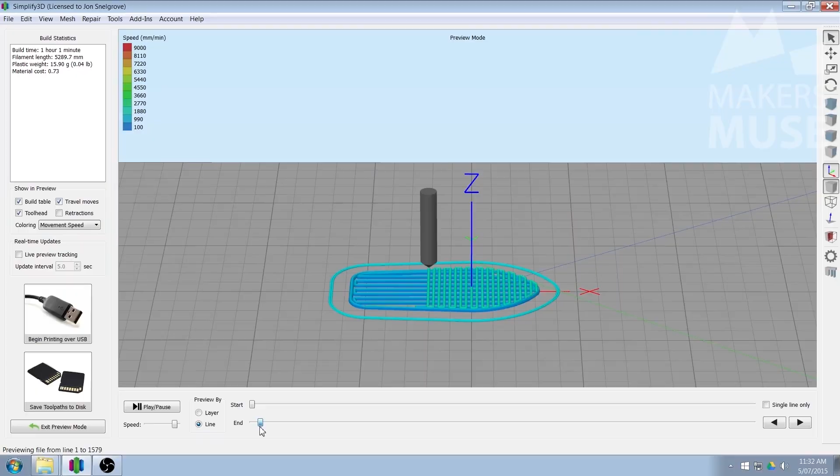So tools of the trade, you're going to need some measuring tools. So what I have here is a ruler and a pair of digital calipers. So ideally you want a really nice pair of vernier or digital calipers. These are some pretty cheap ones, like 10 bucks or something. I got them quite a while ago. But they'll do for our purposes.

But before we even jump into Fusion 360, we want to draw what we're going to model. And this is really important. I always recommend that you draw and plan what you want to model before you model it. And that's because you don't want your creativity to be limited by your knowledge of a certain bit of software. And that will happen if you start modeling straight away. So let's grab a pen, let's grab our calipers, and let's figure out what we're actually going to make.

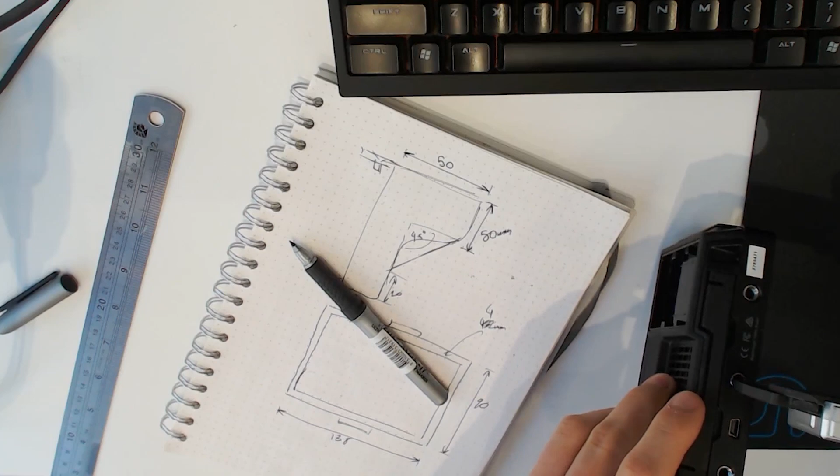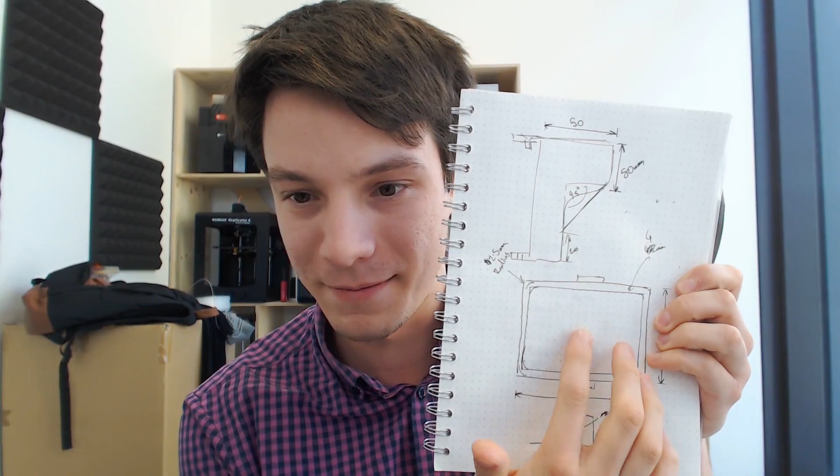Alrighty, so it's a very quick sketch, but this is what I've come up with. Basically, I've tried to copy the other glare shield, and I've just made it fit this monitor. So I've got this really basic shape here with the dimensions. I've got 138 by 90 millimeters on the outside, then a 4mm wall, and then I've got it sticking out by 50. Maybe too long or too short. That's how much this one sticks out.

So I'll try that. The good thing about Fusion 360 is it's parametric, so you can go back and change things and the whole part will update, which is cool. Let's get started. Let's jump into Fusion 360.

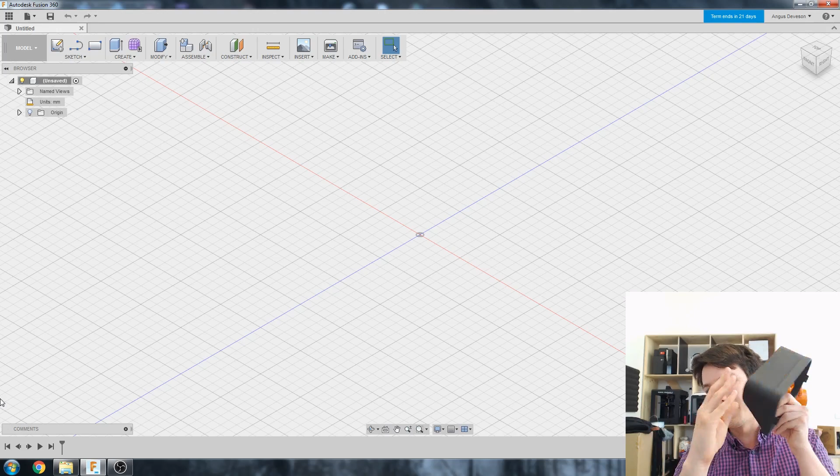Alrighty, so we're in Fusion 360 now, and this is a pretty simple shape to design. So I'm thinking what I'll do is I'll do the outline for the hood and then do an extrude. Then I will do a cut to make it into the right sort of shape. Then I will do the two little tabs to attach it to the thing. So it should only really be 3 operations, 3 sketches.

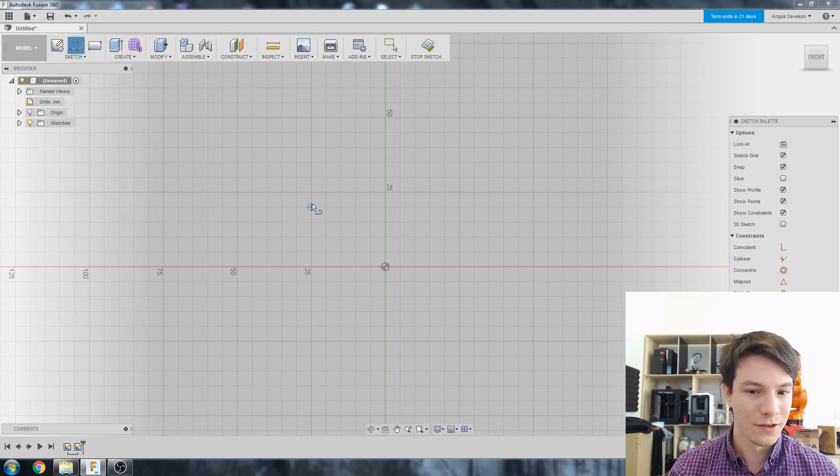Let's have a look. So first we want to create a sketch. So let's go to sketch, and I'm going to create it on the front plane. So front, select, zoom in, and let's start making our thing. So I guess the main shape is a rectangle, really. So let's start with a rectangle, but I'm going to start with a different kind of rectangle. I'm going to start with a center point rectangle. I always like doing things perfectly on the origin.

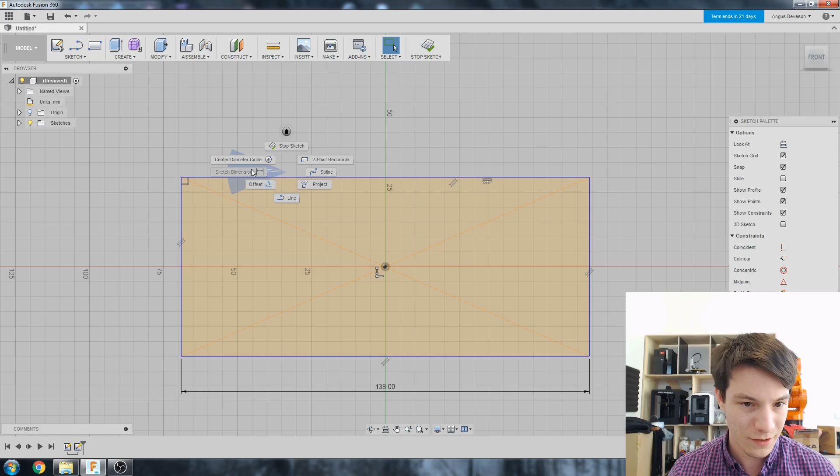So let's go from the center out, and let's enter 138, and then we need to define the height as well. So let's see if we can do that. Sketch, dimension, and let's define the height as 90. All right. And we want to offset it by 4mm to create our little inner wall.

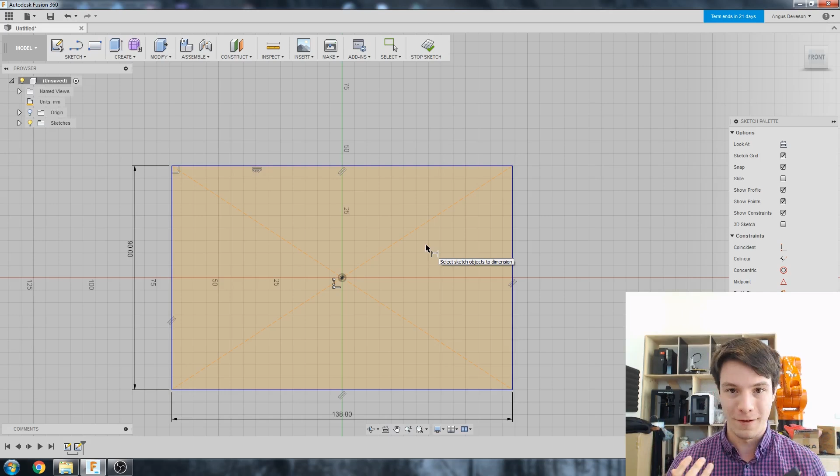But before I do that, I have to guess what radius this is. I don't have a radius gauge, and that's the only realistic way you can accurately measure radiuses, or radii. But it looks like a 2.5mm. So I'm going to go with that, and let's see how that goes.

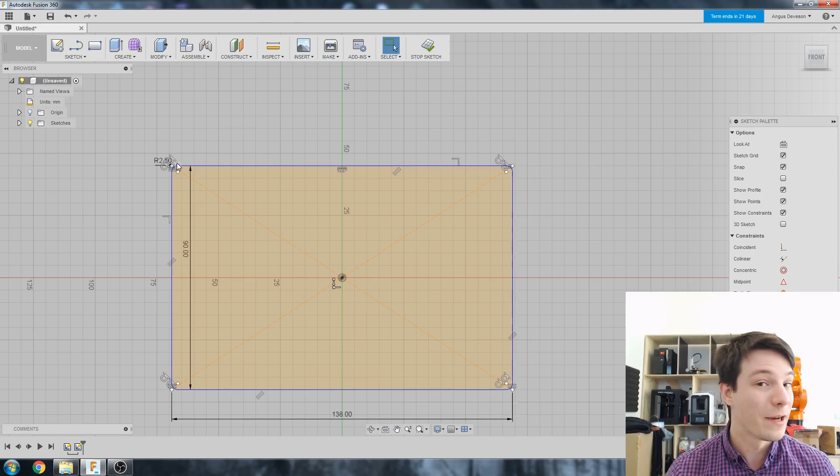So to do a radius on your sketch, we want to go to sketch, and then go down to fillet. So fillet, radius. And we're going to select these two, and then these two, and these two, and make them all 2.5. There we go. So they're all going to basically follow each other. So if I update this, I can parametrically change my design. So that's pretty good, pretty simple.

So we've got 2.5 fillets, and we've got a shape that's now going to be offset by 4 mil. So this might make the fillet break, maybe, but we'll see how we go. So we're going to go to sketch, and then we want to offset. Select what you want to offset, and then we want to make it offset by 4.

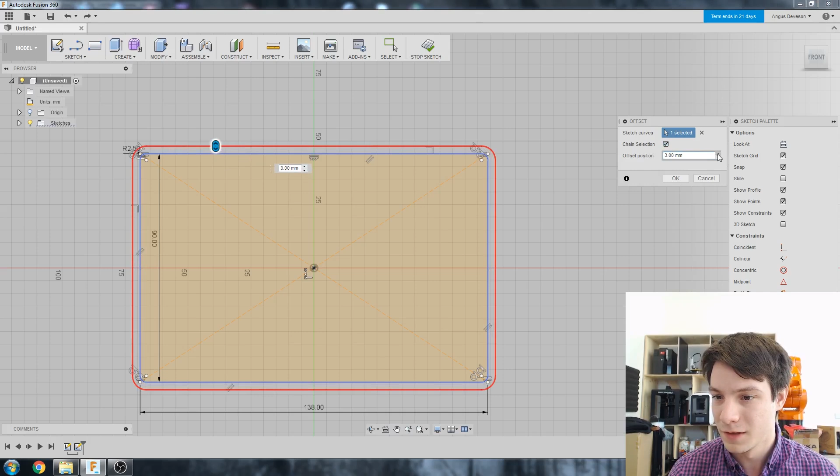But we want to offset it in the other direction. There we go. -4. Cool. So like I said, it did break that fillet because, imagine the fillet's here, it can't actually be concentric with it properly. So we can just add another small fillet just to make it look good, I guess.

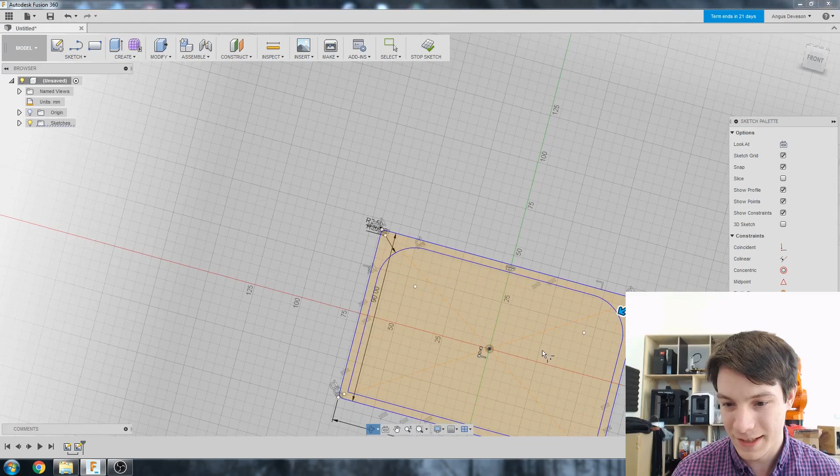So let's go to sketch fillet, and we'll click around. I quite like that Fusion 360 is not throwing a fit here. Oh, now I'm throwing a fit. I'm not used to the hotkeys, I will say that. So let's go to front again. So you have to hold down Control and then middle scroll wheel click to pan. That's what I was trying to do.

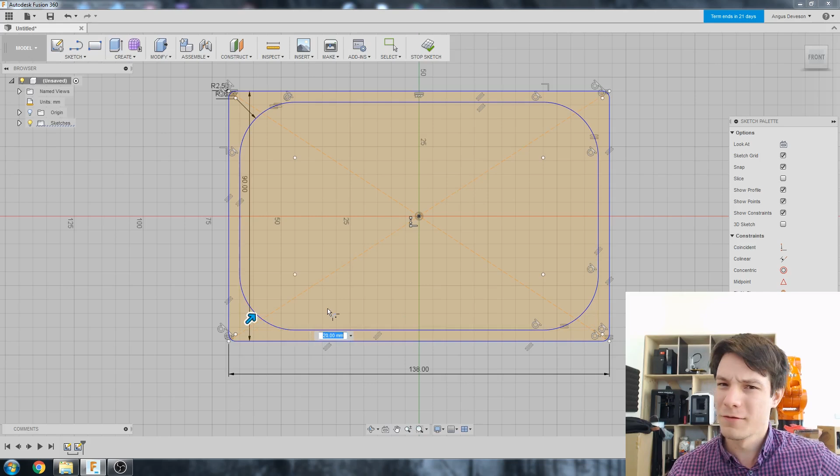Okay, so let's go to sketch again. Sketch fillet, and then let's select these points like that. And I just want a really small fillet just to make it look good. So let's go with 0.5. It might be a bit too small. 1. Yeah, 1 looks good. Okay, so it's not going to be concentric, but it will look good. And that's all we really need to do for that step, basically.

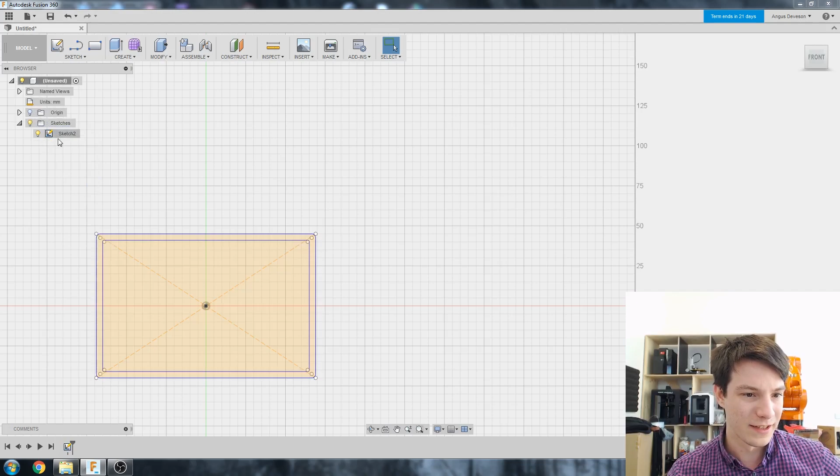So let's just now stop the sketch. And if you see on the left-hand side, we've got our parts and our sketches. I don't know why it's showing 2 sketches. Delete. That's the other sketch I started and didn't do anything with. Right, so we've got our sketch, and we just want to add some thickness to it. So that's called an extrude. What an extrude does is it takes a sketch, which is like a profile, and then just sucks it out and gives it thickness.

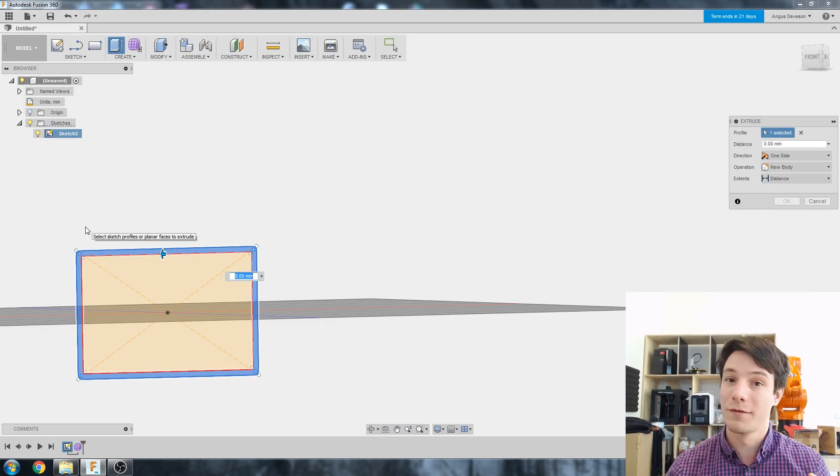So let's go to create and extrude. Awesome. So extrude, we want to select the profile we're extruding, which is of course the thin profile that we drew. And because we accurately measured what we want to do, we want to extrude it by 50 millimeters. So 50. How easy is that? So here's our sunshade so far. You can already see it's starting to make that shape. We just now need to start cutting away to further refine it.

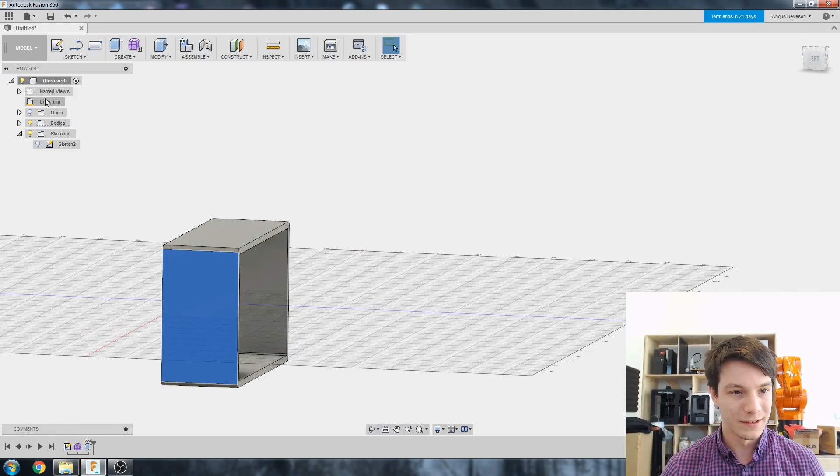So let's select this face here, and let's make a sketch on it. Create sketch. And what we're going to do now is cut. So instead of doing an extrude, we're going to do what's called an extrude cut, where it will take away material instead of adding it. Right, so I've got my shape, and I'm just going to start drawing out what I want to cut away. So go to sketch, and this time I'm going to select sketch line.

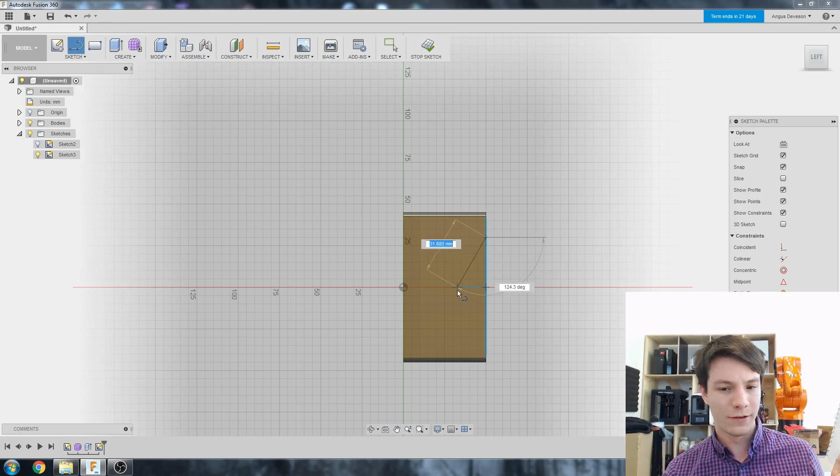So I'm going to go from here, go down 45. I will refine this later with dimensions, and then down. And because we're doing an extrude cut, we can actually overshoot a little bit like this. There's no harm at all in doing a nice chunky block. This is what's going to cut away. So happy with that, cancel. And then we can go to sketch and sketch dimension.

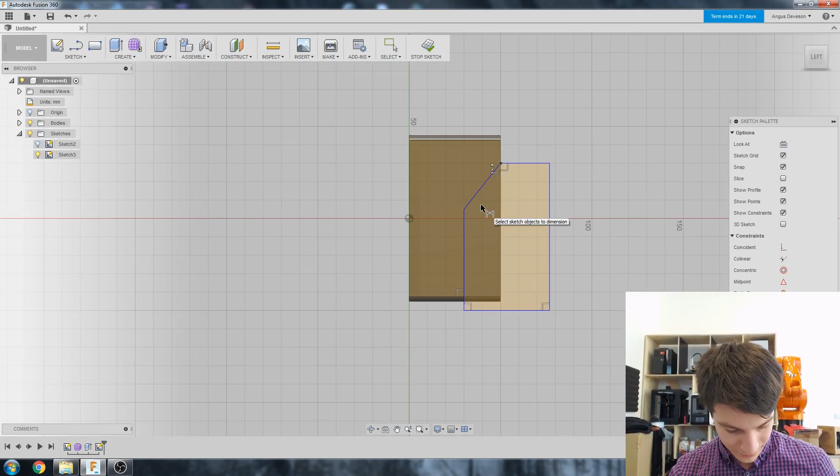Right, so what I've got here is the top part goes down 50 millimeters. So I'm going to select the edge of my shape and here and enter 50. Right, so as you can see already, because this shape is quite a lot larger, this might be a bit too deep. So maybe I want to make it 40. Maybe that. And again, we can go back and change any of these dimensions. It's extremely easy to do, and that's why parametric modeling is so powerful.

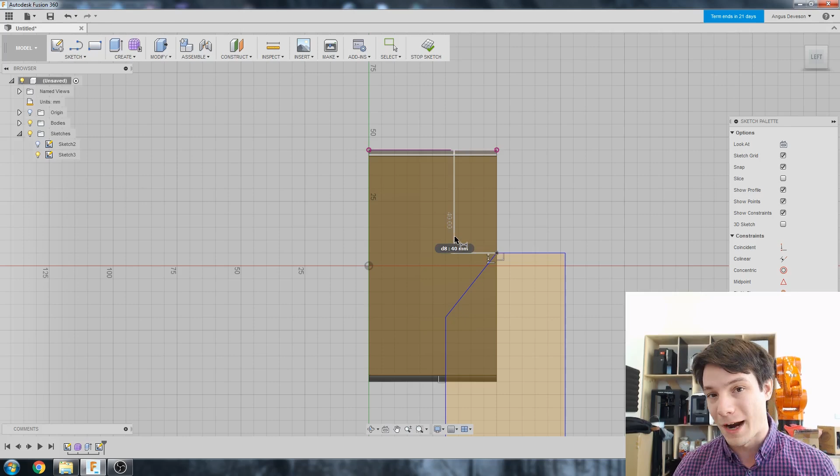So happy with that. And then it's 20 from the bottom. That's what I've got there. So let's go from here to there. 20.

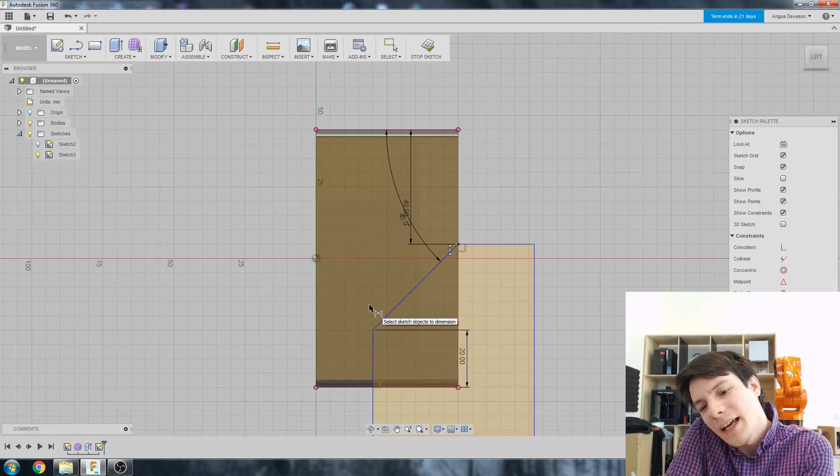Now I wrote 45 degrees here, but it doesn't necessarily have to be, but we'll see how that looks. So 45. Yeah, we'll see how that goes. That doesn't look too bad. I won't add any sketch fillets in. I think I'll fillet it later.

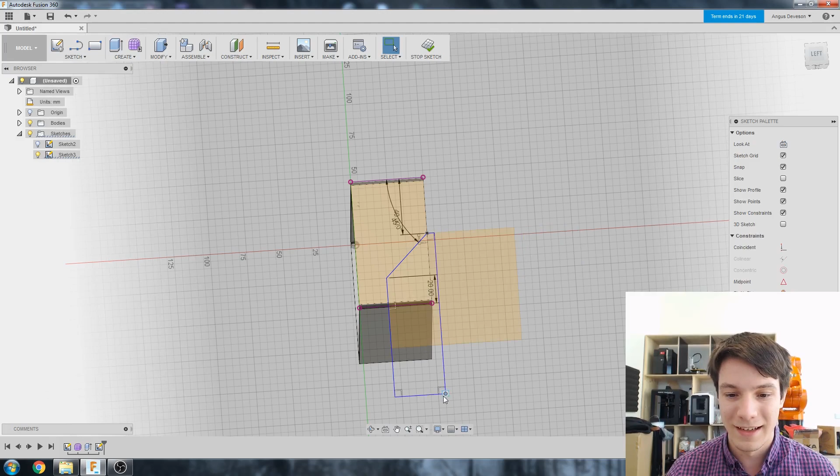If you ever wondered if your sketch is fully constrained or not, just grab a point and move it around and see what happens, see what moves. So if I move this, can't move it, right? But this one, you can. It's not constrained. So if this was important, you'd want to constrain it to make sure that it's locked in space and also exactly where you want it, instead of just drawing it and hoping it stays in place. So because that's just irrelevant, it's just going to cut away. I don't care about that, but I do care about these ones, which are all constrained.

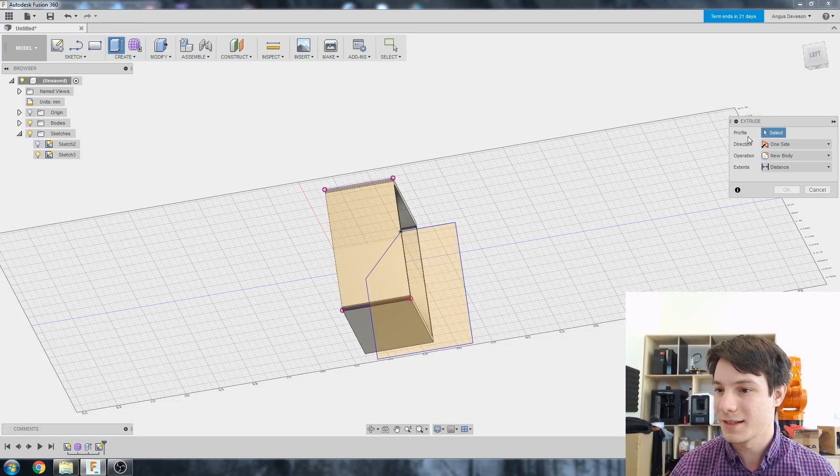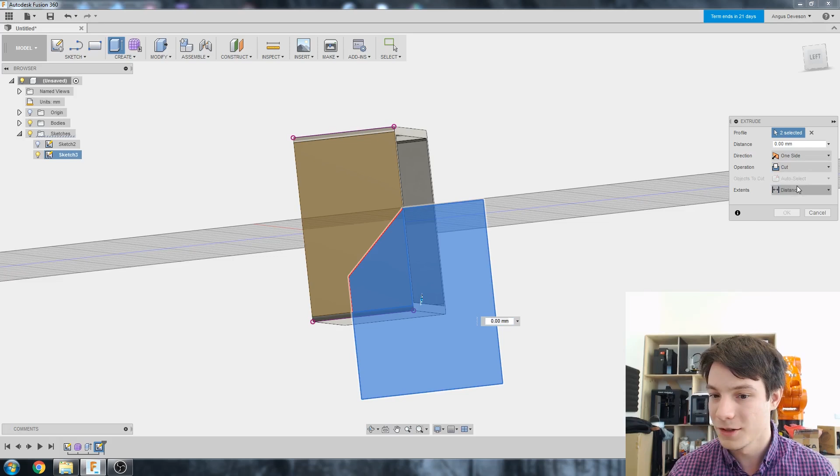Good, so let's stop the sketch, and let's go into create, extrude. But this time, we're cutting away. So let's select our profile, so select the sketch. Notice it automatically sort of works out where you might want to cut away. So here I had to select all of it because it suggested, did I just want to cut this away? Which is actually all I do want to cut, but it's got that radius there. So select both. And we want operation, cut. So we're not joining, we're not adding a new body, we're cutting away.

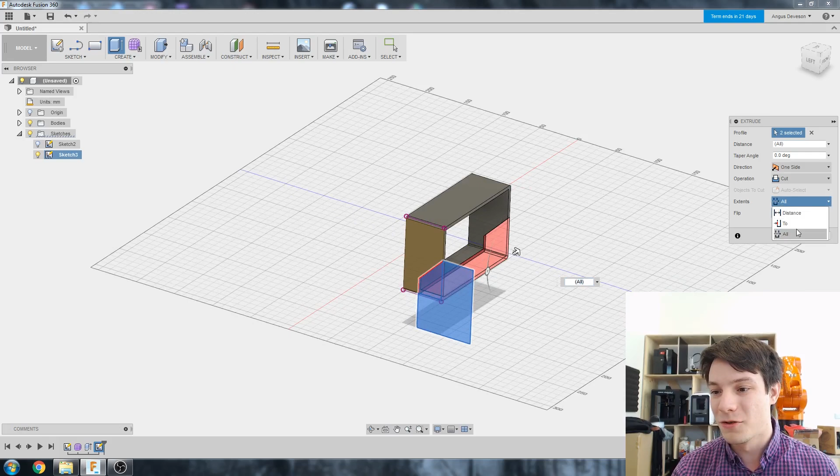And the distance, well, realistically, it's through everything. So that's just cut all the way through. I'm used to SolidWorks where you have an option to just cut through all, but there doesn't seem to be that kind of option here. Oh, there is. There you go. Here I am saying it can't do it, and it can. So extents all means it's going to go straight through your object, which is exactly what I want in this circumstance. Done. Okay. So here we have our shade. It's already starting to look like what we want. We're almost there.

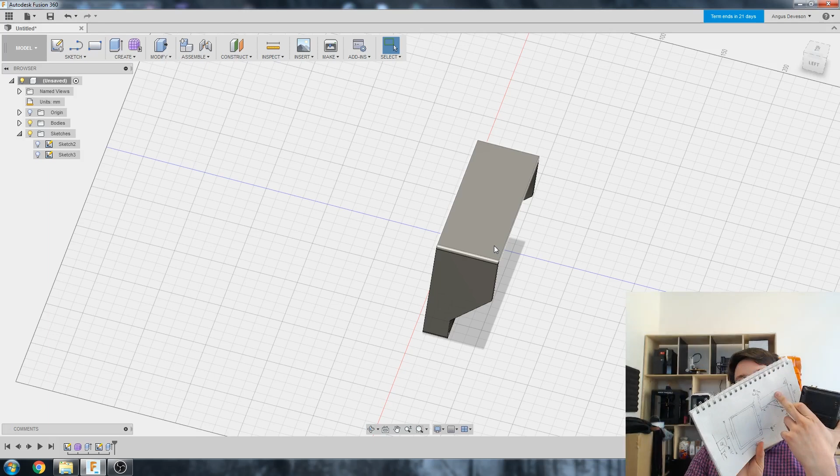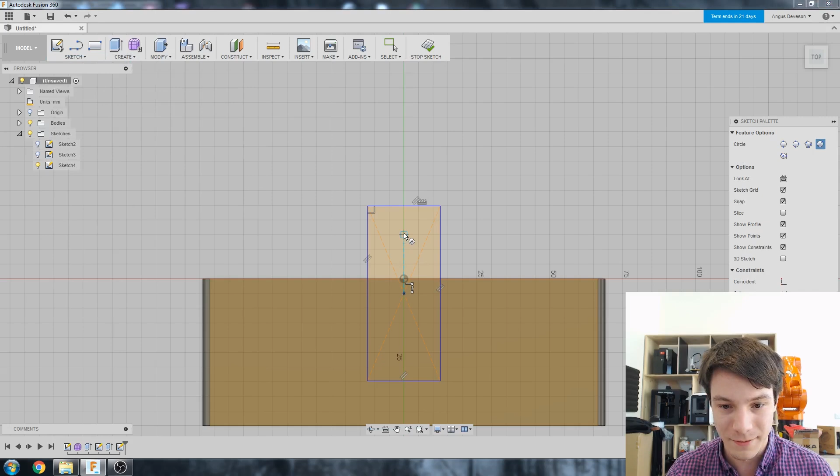So all we need to do now is find out how to connect it. And I suppose the best way to connect it is using these two threaded contact points. So the easiest way to do that would be to use two tabs, which I've drawn on here. So let's start drawing those. So I'm going to select this top face here and create sketch. And again, I'm going to use a center point rectangle just because I like them. So sketch, rectangle, center point rectangle. Drag one out like that. And also we're going to need a circle as well. So sketch, circle. Again, I like the center point circles. There we go. Right. Cancel, and let's start dimensioning this up.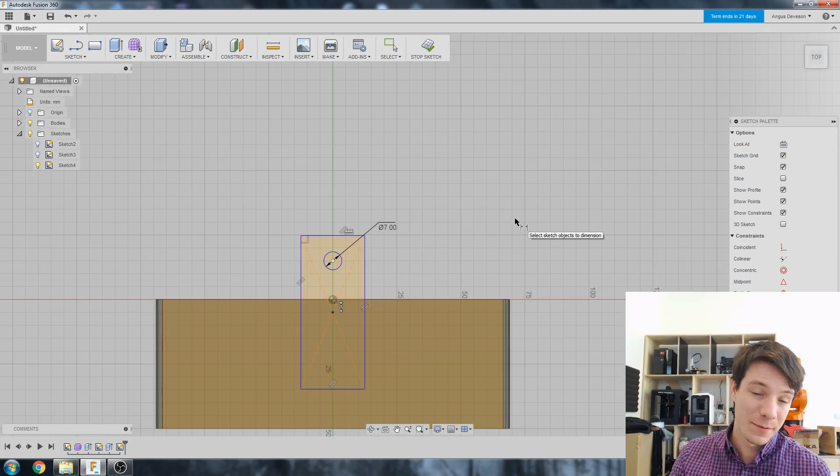So sketch, sketch dimension. So for this circle, we need to give enough clearance to allow that screw to go through. So if this is a 1/4 inch, it would be 6 point something. So I'm going to make it 7, just to add a bit of clearance. Knowing 3D printing is not 100% accurate, especially FDM, that will mean we've got a nice amount of clearance there. So go with 7 there. And I did measure the distance from the main body, and it's 10. So let's go with that. So here to here, 10.

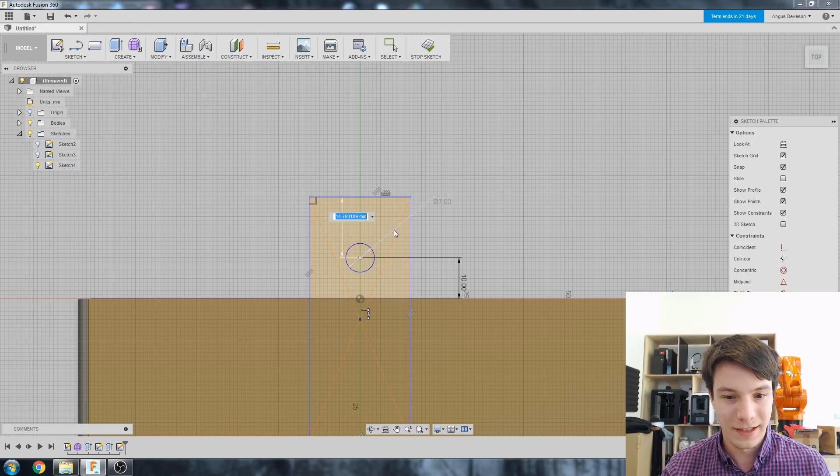Sweet. And then we just need to allow enough meat around it, I guess. So yeah, let's go here to here, maybe 10. That'll be plenty. And how wide our tab is, we can go from the center again. I guess we could do 10 again. Oh, that moved it. So this is a good example of constraining things. So here, because I entered a 10 there, it moved my circle off center, which is not what I want. So this would be a good example just to demonstrate how constraints work. And in future videos, I'll go into much more detail about how constraints work and how powerful they are.

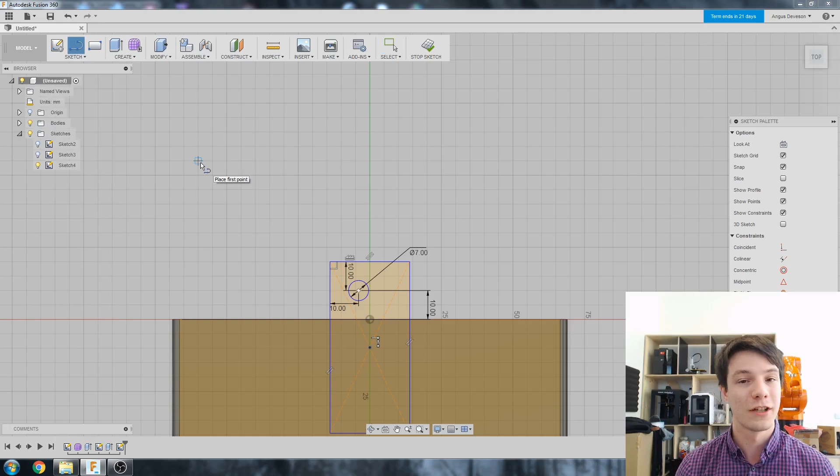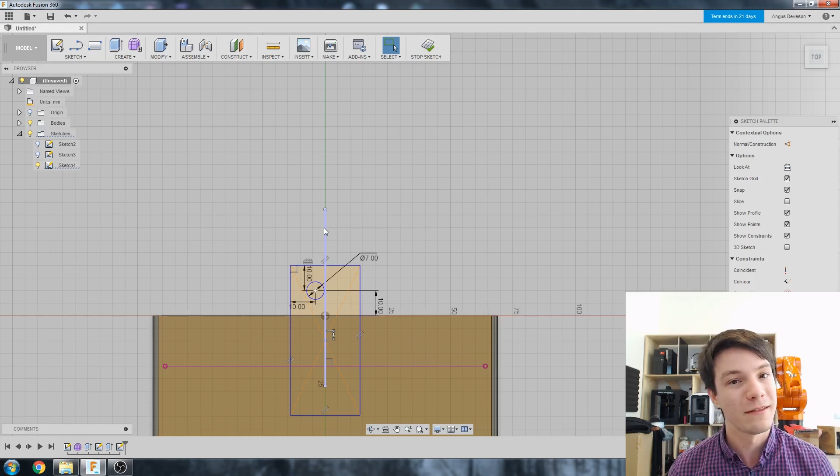But in this case, I'll just show you how to do a coincident constraint and a midpoint constraint, which can be very powerful and simple and a great way to stop this kind of thing happening, especially with symmetrical designs. So I've got a line here, and I'll draw a line right through, like that, all right? So we're going to turn this line into what's called a construction line, which means it's not used to create geometry, it's just used to help construct geometry, like a scaffold. So to do that, right-click the line, and then we're going to turn it into construction, or normal, depending on how you're using it.

So this line is now not going to affect our geometry, it's just going to help us line things up. So we can select the line, hold down Shift and select the circle, and then when you right click, it gives us some option for different constraints. So here we have a few different types: midpoint, coincident, or fix.

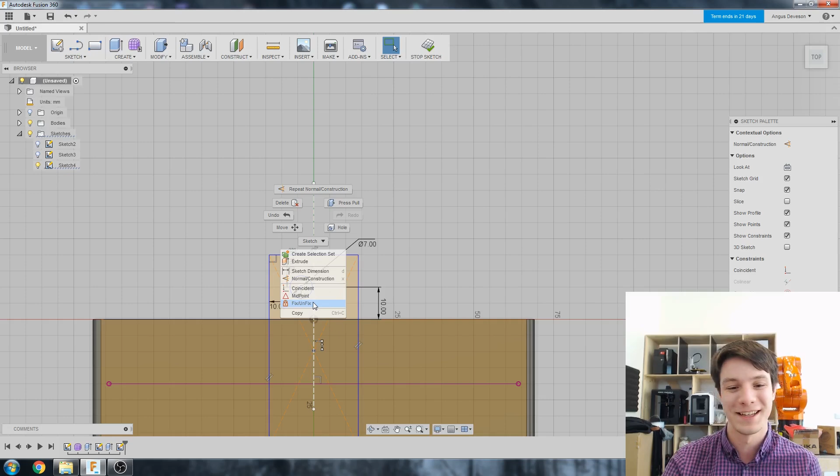Never do fix. Fix is evil, it's really bad practice. I'm never going to talk about fixing and how to use it in my videos because it's just bad practice. Always use proper constraints. Okay, coincident, that's what we want. Coincident, perfect. Alright, so we've got a coincident constraint between our construction line and our circle.

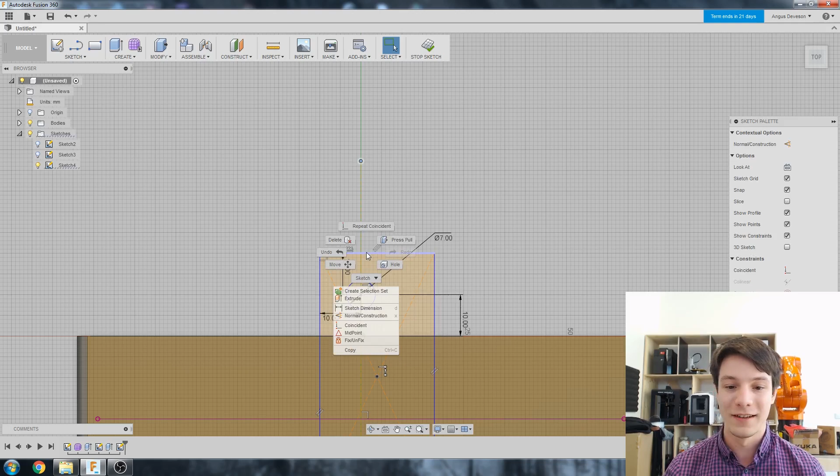Now I'm going to make a midpoint constraint between our construction line and our rectangular tab. That way they'll always be perfectly in the center, and no matter what we change, that won't break. So we're going to select the end of our construction line, that point, hold down Shift and select this line. Right click, and we want midpoint.

Alright, that's pretty nice. Then there's only one last thing we need to change. We haven't told the construction line that it needs to be centered. So if I move it, everything stays perfectly with each other, but it's not going to stay perfectly centered in the shape. So I'm going to select my construction line, point here, and this one, right click, and midpoint. And there we go. We have a perfectly centered shape.

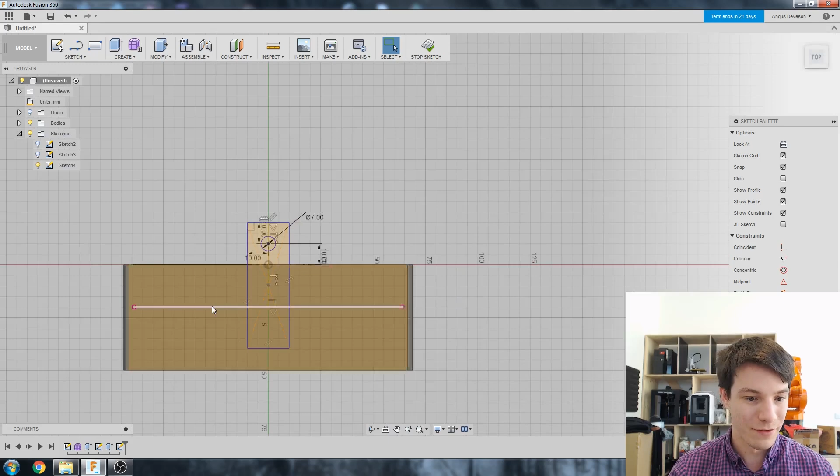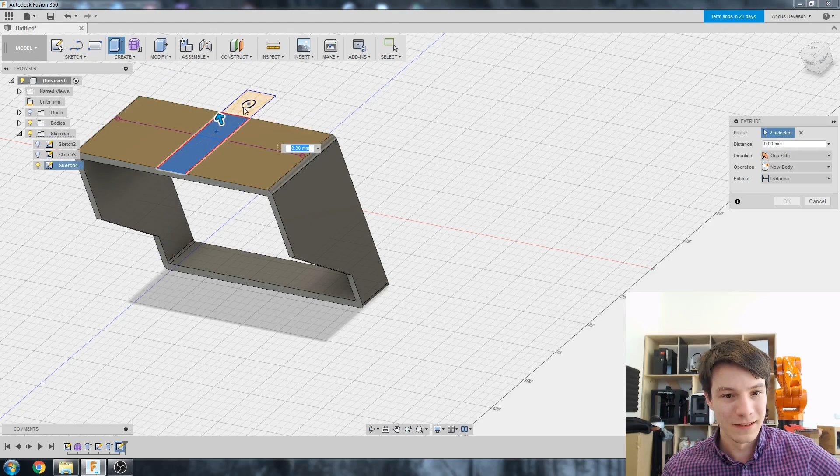So now if I want to thicken up my tab, perhaps it's too weak, I can change this to 15, and this to 15, for example, and everything will stay centered, which is perfect. So let's stop the sketch and let's give it some thickness. So let's go to create, extrude, and we're going to select our profile. And I think the main body is 4, so maybe 4 is a good thickness.

When you do the operation, as we saw, you can create a new body, you can cut, but in this case it automatically selected for me, which is very clever of Fusion, to join, which is what I want. So we want to join our shape. Awesome. Alrighty, so we've got our tab, and now we need one on the other side. So that would give it a bit more stability and a bit more strength.

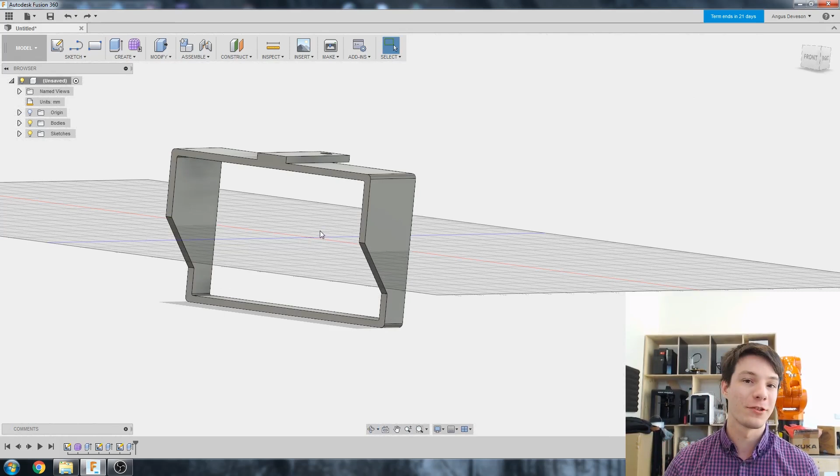And we could remodel it. We could remodel another tab, copy the dimensions, do that sort of thing. But I'm lazy. I like to model smart, so let's just use the mirror tool, which is pretty handy and an easy way to copy what we've already done and just paste it somewhere else, basically. So let's go to create and mirror.

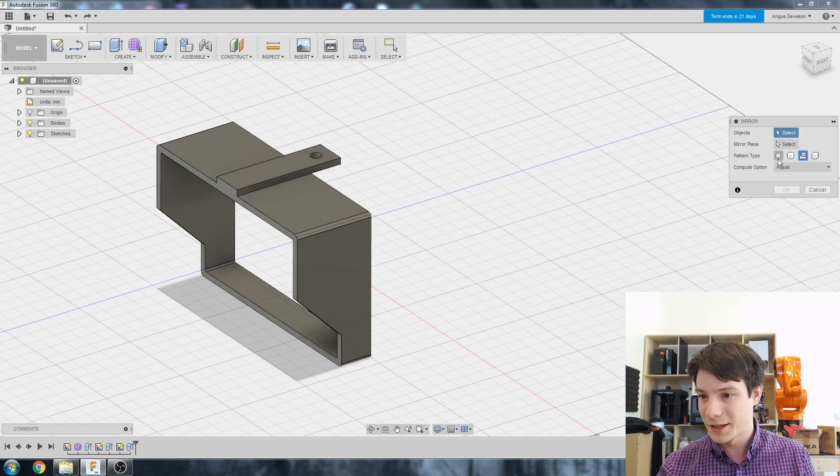So there's a few different types of mirrors. You can mirror objects, faces, and features, and what's the pattern components. So yeah, faces, bodies, features, which is great. So we want to pattern a feature. We want to pattern the extrude we just did. So select. Make sure you have features selected, then down the bottom left we'll select that extrude,

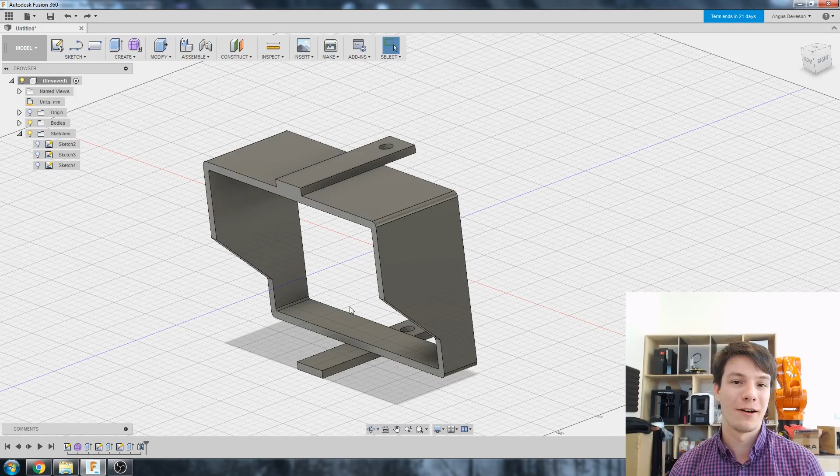and then mirror plane, because we modeled our main shape with the center point right in the middle, we can mirror from the top plane there. And okay, alrighty, so we've mirrored our tab, and you can obviously see there's a bit of a problem there where the tab now on the bottom part is sticking out beyond. So there's probably more than 2 different things we could do here. But what I want to show you now is the power of parametric design.

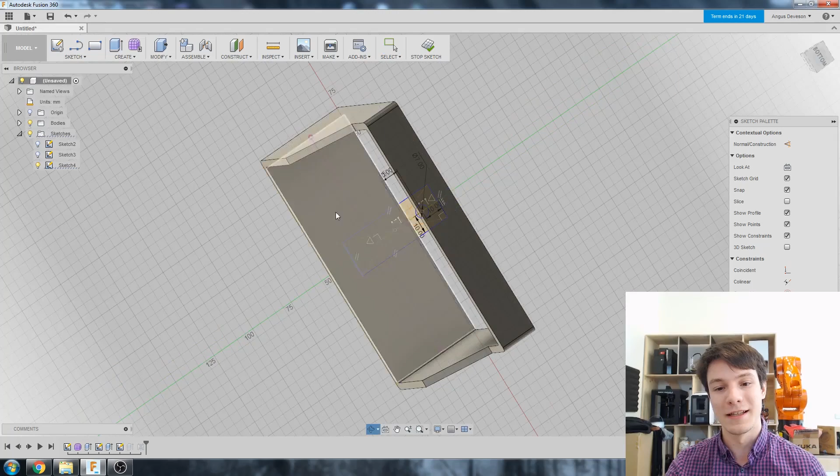So I'm going to go back to the original sketch of this tab. Go back here, right click, edit sketch. And here where I had the tab collinear with this part of the design, I'm going to get rid of that, delete. And instead, now I can move it, I'm going to make it collinear with this part of the design. So a little bit tricky to line up, but we should be able to do it. Bottom view. Select, right click, collinear, there we go. So all about lining it up.

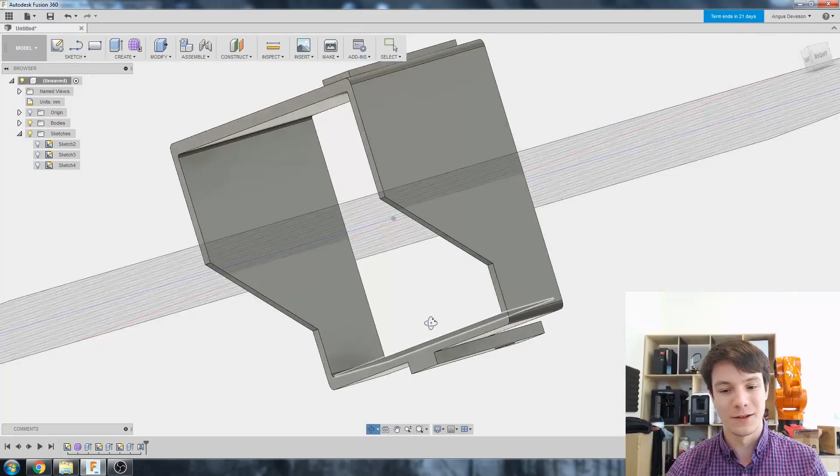So now, if we rebuild, stop sketch, there we go. So it's shorter on the top, which is fine, it's going to be strong enough. And now it's perfectly sized on the bottom. The other approach we could have done is we could have modeled these before the cutaway, and then the cutaway could have cut it off completely, which would have worked fine as well.

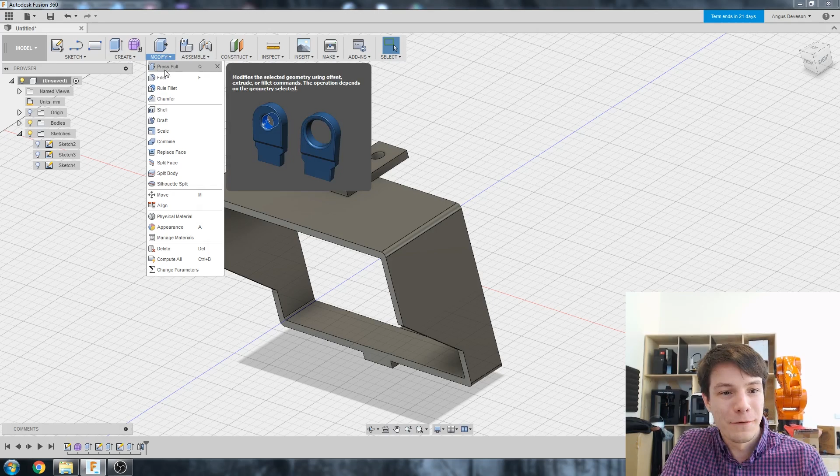But for this, I mean, it's a shade for sun glare, so it doesn't need to be that strong. Right, and the last thing we're going to do to this is purely cosmetic. We're going to add some fillets to make it look rounder and a little bit sexier, I suppose. So we're going to modify and fillet, and we're going to add some nice, sexy fillets. So let's select our edges here and here.

Well, they are sexy. What a weird statement. I'm an industrial designer. Fillets make things sexier.

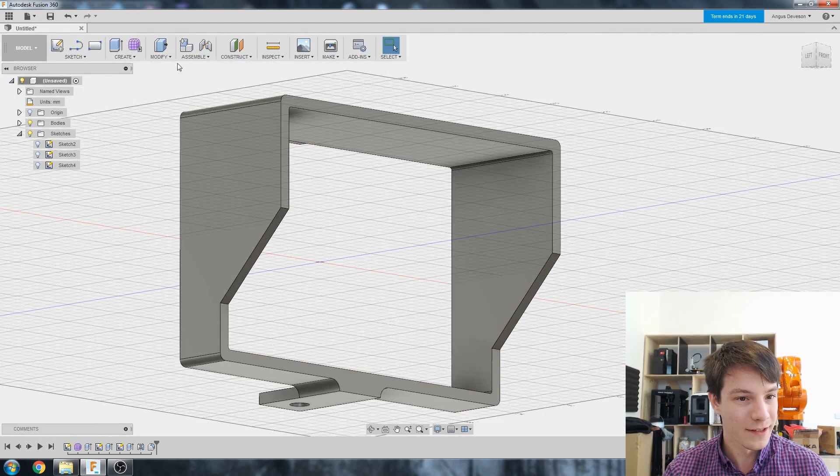So here we go. And let's go with 4. Sweet. So the fillets there look pretty good. Now we just want to add some here, I guess, to make it also look nice. So add one there and there. Nope, not there. There and there. And we'll make these quite large, maybe 12. Yeah, possibly even larger. 20? 20 looks pretty good. Let's go with 20. Cool. So that's our design. Pretty happy with it.

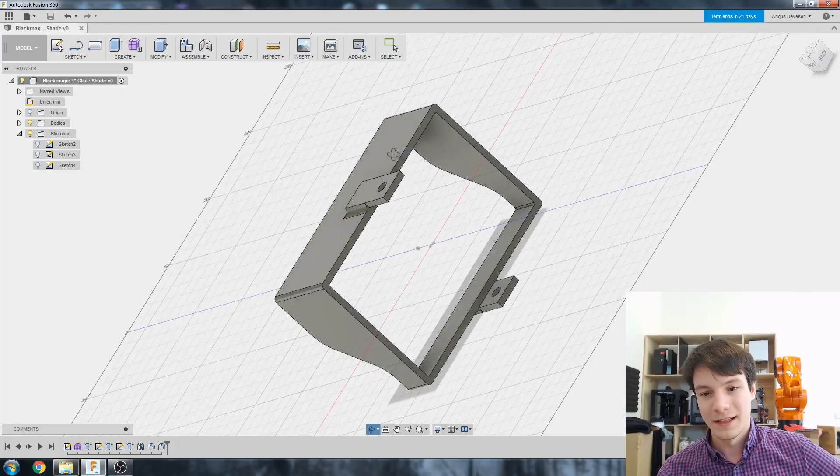So now I'm just going to save it as an STL for 3D printing. So the way you save STLs out of Fusion 360 is you go to File and then 3D Print. You select what you want. So let's select the shape. And refinement, medium will be fine. And I don't want to send it anywhere. I just want to output it. That'll be fine. So there we go. And we'll print it out.

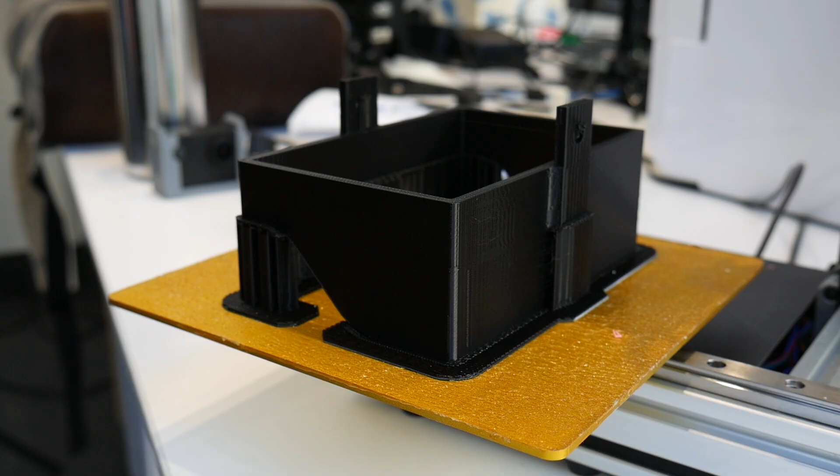And here's the final result, guys. So this is our shade for the Blackmagic 3-inch remote HDMI monitor. And here's the monitor here, and it seems to actually work pretty good. It goes over the monitor there. I did just guess the radiuses. They're probably a little bit sharper than the actual thing, but that doesn't matter. And look, it's going to protect it from glare really, really well. So I'm really happy with this.

It's my first ever proper Fusion 360 model, where I've properly put the time into dimensioning it, adding relations, and doing a lot of that sort of stuff. And actually, I'm quite happy with using Fusion 360 as a proper modeling package. So you can look forward to seeing a lot more Fusion 360 tutorials and projects here on Makers Muse, because it's free, it's powerful, and from what I can see, it does exactly what I need.

I did notice also on the model that I printed on the Cetus, a few people were asking if the cantilever design induces any sort of errors or ringing, and I can confirm that, yeah, it actually seems to. So with this model, the side that was closest to the support is perfectly smooth, and the side that was further away has very obvious ringing. So that cantilever design definitely must induce a bit of vibrations as it gets further out. The print head moves further out, there's mass, and when it does the infill, that certainly must have a bit of an effect on the model.

So to fix that, I guess, I mean, this was on a medium speed, like normal. You could go a bit slower, or I guess you could modify it to add a rod to support that. I don't know, but it's just worth noting, guys, that it does certainly seem to make a difference depending on how far away from the support you print. But overall, I am really happy with this model printed in their own brand of black PLA.